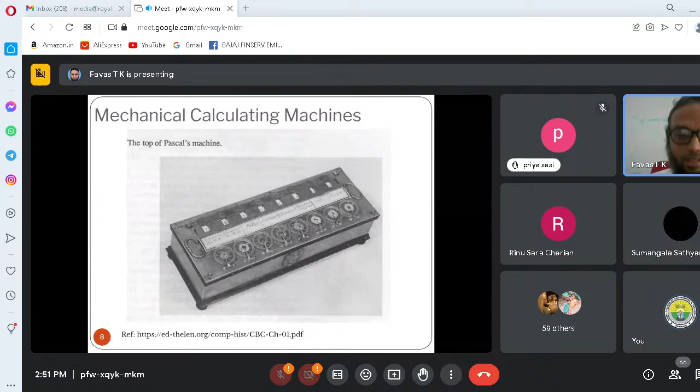Several mechanical calculation machines like Pascal's machine and Leibniz machine operated mechanically. Especially we have the mechanical engineering stream as part of this conference. A lot of gears and gear-based mechanical arrangements were used for calculations.

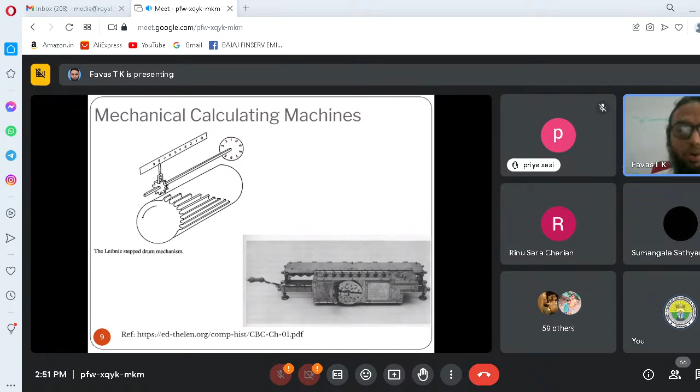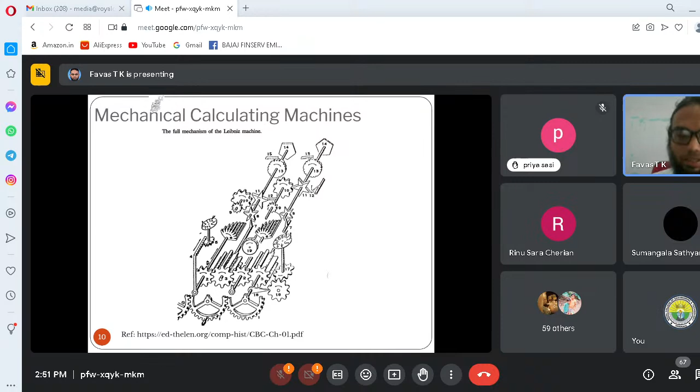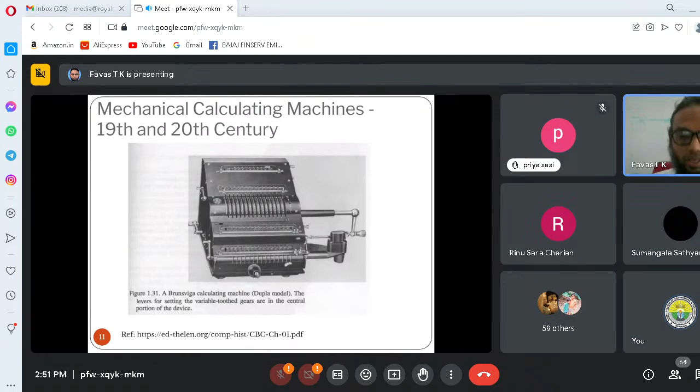This is also the mechanism of the Leibniz machine. You can see a lot of gears, wheels, pinions, and shafts in such mechanical calculating machines. Some more advanced mechanical calculating machines came later in the 19th and 20th centuries. This is one of such calculating machines, and the Millionaire, another calculating machine.

Then the history of modern computers: we know scientists like Charles Babbage, and in the 19th century the development of modern computers actually happened.

Then the different generations of computers: the first generation using vacuum tubes, second generation using transistors, third generation using ICs, and the fourth and fifth generations using very large scale integration (VLSI), ULSI, and microprocessors, etc.

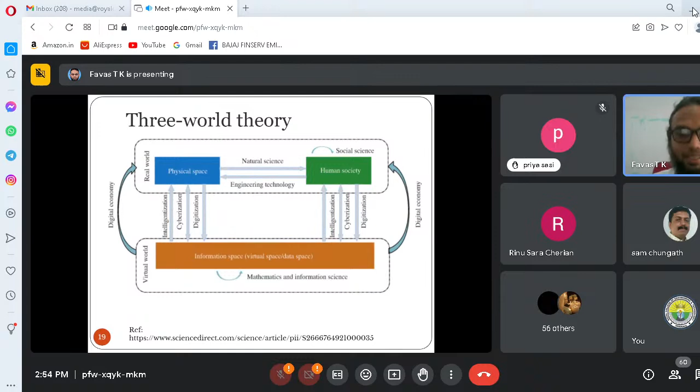Now in the present, we have the physical space, human society, and another space which is the information space, or virtual space, or data space. This is the three-world theory of the present.

Along with the development of computing power, another issue we are facing is the generation of heat from these sources. All computers have become miniaturized, and we have handy or pocket-sized computers, but the number of chips is increasing while the density or space is very limited.

That means heat generation is increasing while the size is decreasing. This is creating a lot of issues, and one prediction says it may even approach the heat generation of a nuclear reactor from these small-sized devices. A lot of accidents are being reported nowadays - bursting batteries and similar cases are being reported in the media.

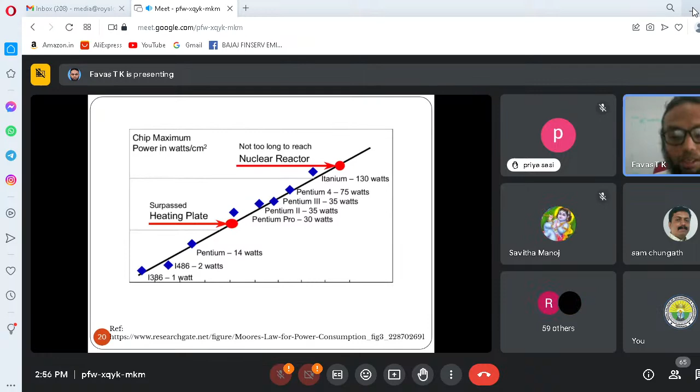The cooling of these computers is also another important area, along with the increase in computational power and computational speed. We should have technologies for the cooling of computers and computing devices.

Coming to engineering prediction, in any branch of engineering we have different methods of prediction: experimental, analytical, and numerical. We do experiments in laboratories and find out, with respect to some independent variable, how the dependent variable varies and how the performance is. Different performance curves are plotted irrespective of the engineering branch.

Then we have another method, the analytical method, where we basically solve the mathematical equations pertinent to that particular problem. Numerical methods are also there, meaning we solve the problems numerically.

The growth of computers has contributed a lot to the development and acceptance of numerical methods. The numerical methods are basically a subset of mathematics.

We have numerical analysis in mathematics. Generally, in the BTech curriculum, the third or fourth semester, numerical analysis is taught. Numerical methods in engineering is also there.

But the growth of computers and computational speed has also caused a lot of acceptance for numerical problem solving or numerical methods in engineering. This means we can get solutions fast from numerical methods.

The experimental methods generally may take time and also be costly. A lot of apparatus setup is required for the experiments.

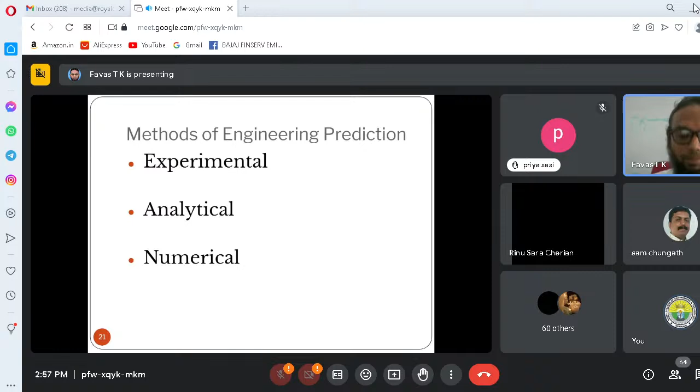In any of our engineering subjects, basically what we are doing is developing a simple mathematical model. Whether it is a fluid mechanics subject or a solid mechanics subject, what we are doing is explaining a physical process and trying to develop that process in terms of some independent variable and dependent variable—how the dependent variable varies with independent variables, some parameters, and some forcing functions.

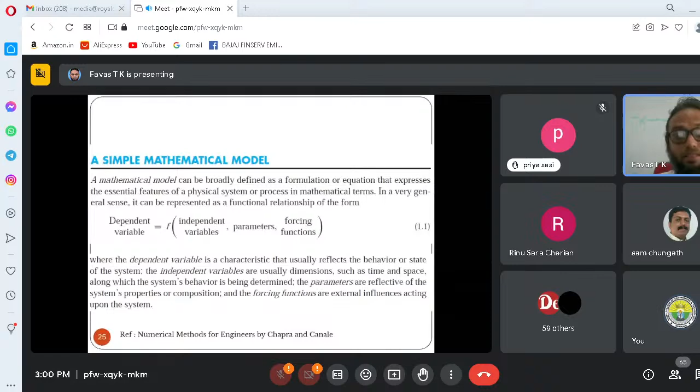How this relation development or derivation is the basis of any engineering subject, or at the end of the subject or module for a particular engineering subject you are studying—what is happening is that there may be the derivation of a particular equation subjected to that physical phenomena.

Such differential equations are very common, and sometimes there may be algebraic equations. Algebraic equations are very easy to handle, but whenever it comes to differential equations or complex differential equations, you can see that in mathematics, physics, chemistry, biochemistry, economics—everywhere differential equations are there. Whenever coming to engineering problem solving related with fluid mechanics, solid mechanics, and chemical species or mass concentrations,

related to mass species, we are using some general principles of nature, like the law of conservation of mass, law of conservation of momentum, law of conservation of energy. Then we are formulating integral or differential forms. Sometimes the differential equations may be ordinary differential equations or partial differential equations—we have to solve them. These partial differential equations may be linear or non-linear.

There is also some mathematical nature of the equations. Elliptic equations may be there, like Laplace equation, Poisson equation in mathematics. Then parabolic equations may be there. Hyperbolic equations like wave equations may be there. So these types of governing equations we are basically deducing in our engineering subjects.

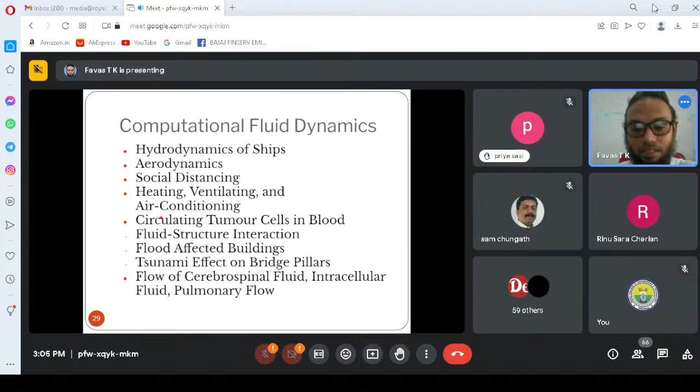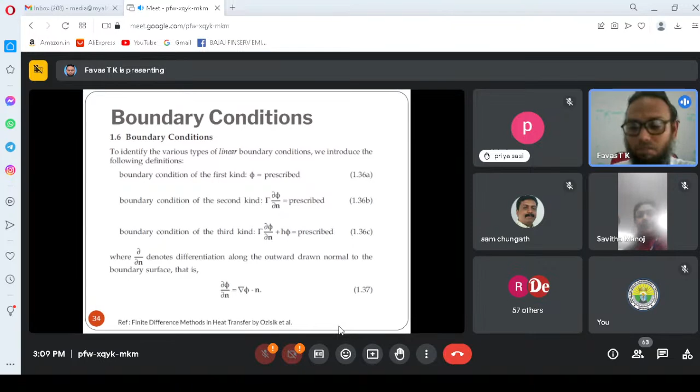Realistic boundary conditions are required so that we get a unique solution to the problem. There are different types of conditions. If a dependent variable value is specified, or its derivative is specified - this is a Dirichlet boundary condition. Another one is if the derivative value is specified - Neumann boundary condition. Different types of boundary conditions are there, so mathematical knowledge is also important in CFD-based problem solving.

Then we find out some independent and dependent variables - primary quantities like velocity, pressure, temperature, etc. will be predicted. Using these primary quantities, some secondary quantities like wall shear stress, drag force, or heat flux can be determined.

We have an ODE, dy by dt is equal to a function of y. We rewrite this in another form - not much mathematics, just two examples. This dy by dt, a function, is rewritten as yi plus 1 equals yi plus f into delta t. So this is an ODE, an ordinary differential equation, and the other one is a linear equation.

This transformation technique is generally called a discretization technique in computational fluid dynamics. We are transforming an ODE into an approximate linear or algebraic equation. That is what is happening in computational fluid dynamics, and these algebraic equations are then solved using high-speed computers.

Another difference is that partial differential equations represent continuously varying functions. But this continuously varying function in a 2D domain - you are finding the solution only at discrete points. That is why this is an approximate method. You are not finding the solution over a continuous domain, only at discrete points using computational fluid dynamics, and that is also a limitation with the computers.

You have to be cautious about errors, since it is an approximate method. Instead of dy by dt, where at each point the slope is varying for a curve, you are finding the slope based on some discrete points. So it is an approximate method, and some error will obviously be there.

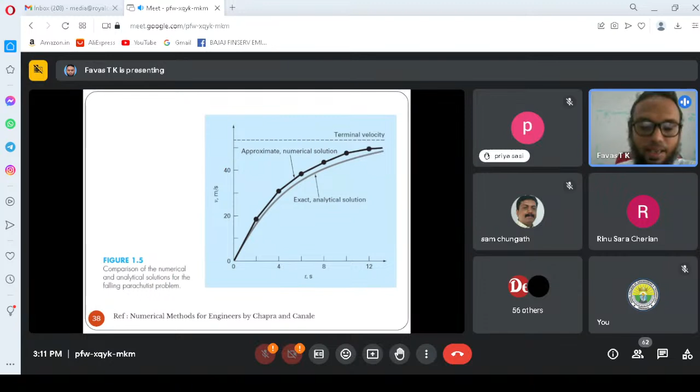You can see a comparison given in Numerical Methods for Engineers by Chapra and Canale. The exact analytical solution of the partial differential equation looks like this, while the other one - found only at discrete points - is the approximate numerical solution, where some error is present. We can reduce these errors by some techniques, by being cautious and properly choosing the grid size and other parameters. But it remains an approximate method - that should be kept in mind.

This computational fluid dynamics problem solving is generally now done using some programming languages like Fortran, C, C++, Python, or some open source software packages like OpenFOAM, one of the extensively used ones, and ModFlow, etc. And some commercial software packages, ANSYS, Fluent, StarCCM+, MATLAB. All this can be used for computational fluid dynamics based problem solving.

And there are obviously, in that, some errors. Like truncation error means error in the formulation. The other one is the round off error, because the computer will be chopping off some digits after some significant digits, some error. So you should have a vision on the errors also.

What is this conversion to algebraic equation in CFD basically done? What we are doing is that we are discretizing the equation. The partial differential equations you are transforming into an algebraic equation, and then we are solving by the computer. There are different methods like finite difference method, finite element method, finite volume method, etc. for this discretization. That means partial differential equations you are converting into algebraic equations not at a single point, at thousands of points. That means thousands of algebraic equations you are obtaining, and manual solution of these thousands of algebraic equations may be quite difficult. Then we are going for high speed computing.

And you can apply this in almost all branches of engineering. If you are taking the marine transportation system, underwater vehicles, surface vehicles, submarines, autonomous vehicles, everywhere there are a lot of applications for this CFD-based problem solving.

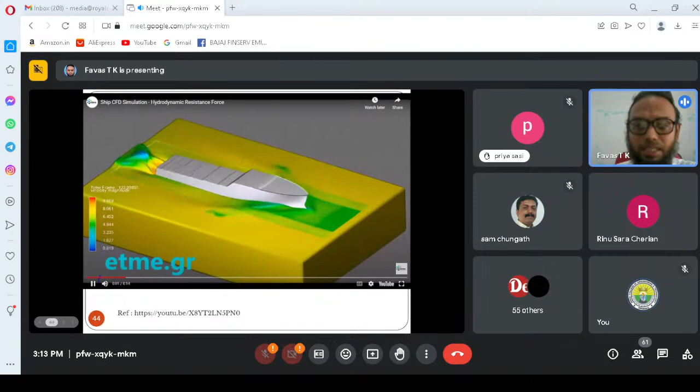And the drag force can be determined, and the engine efficiency can be determined. We can do some ship CFD simulation, hydrodynamic resistance force, and here the velocity can be, sometimes it is also called colorful fluid dynamics, meaning a lot of information can be simulated in colors, but the insight is also very important in this.

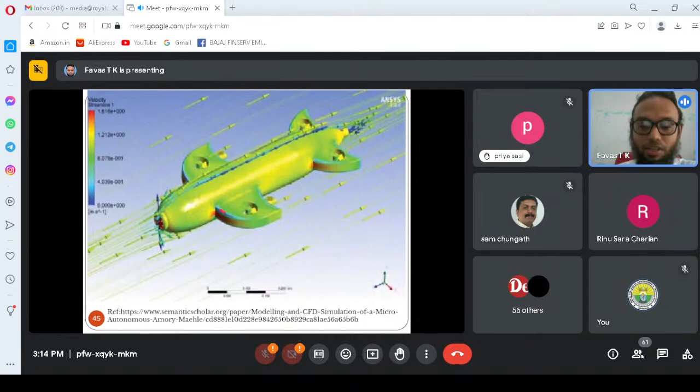You can see the velocity along an autonomous underwater vehicle, AUV, and the different colors, you can see that red is the highest velocity and blue is the lowest velocity, where the highest velocity is there, and where the lowest velocity is there. That means the friction, or some areas are not smooth. Wherever the smoothness is there, there will be higher velocity.

And the pressure is predicted using some ANSYS-based computational fluid dynamics package. These are done by some scholars and available in literature, and here also how the pressure values are varying at different locations.

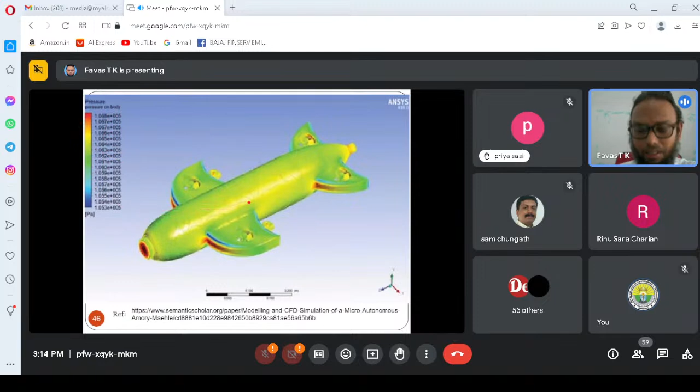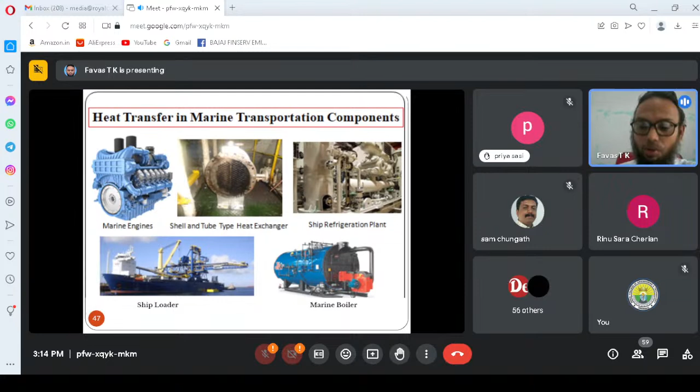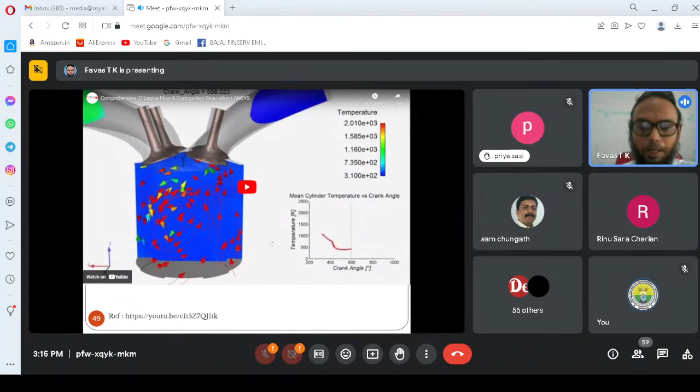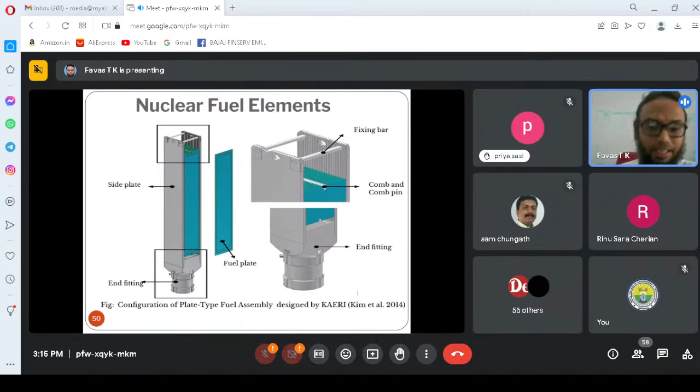And for the solution of nuclear fuel elements, because experiment is very dangerous, its cooling can be predicted on nuclear submarines, and inside how the nuclear reaction and its cooling happens, and there should not be any nuclear accidents, and that can be prevented, or such studies can be done using that. Meaning nuclear meltdown has to be prevented in nuclear submarines and nuclear power plants, and that can be predicted using computers with the help of computational fluid dynamics tools.

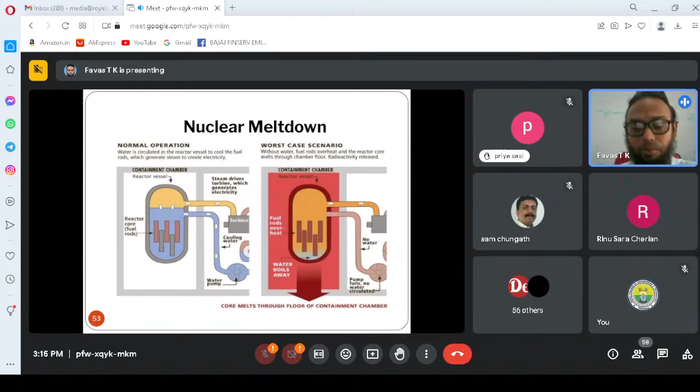And even the cooling of fans in computing, even inside the computers, we can have some applications of computational fluid dynamics. The design of the fans, SMPS fan, case fan, all these can determine how much air circulation is there and how the cooling is there. There also we are solving the continuity, momentum, and energy equation. These partial differential equations we are transforming into algebraic equations, and we are solving using computational fluid dynamics. And even in our laptops, the heat pipes are there for carrying away the heat using computational fluid dynamics.

Even in centrifugal pumps, the vorticity magnitude can be predicted using computational fluid dynamics.

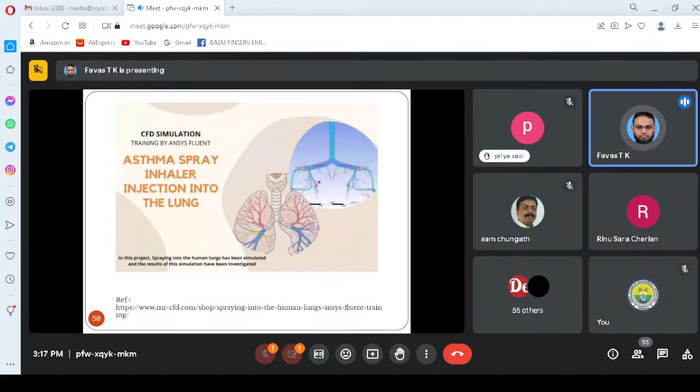Even in health applications, like asthma spray inhaler injection into the lung, if a spray is inhaled, the concentration of that medicinal part reaching the lungs at each point can be predicted using computational fluid dynamics.

Even in vehicles, there is vehicle aerodynamic simulation, and safety simulation can be done for the aerodynamic study of vehicles. This was done using STAR-CCM, showing indicators and total pressure, how the pressure and streamlines can be predicted. A lot of such applications can be done, and all this can be predicted.

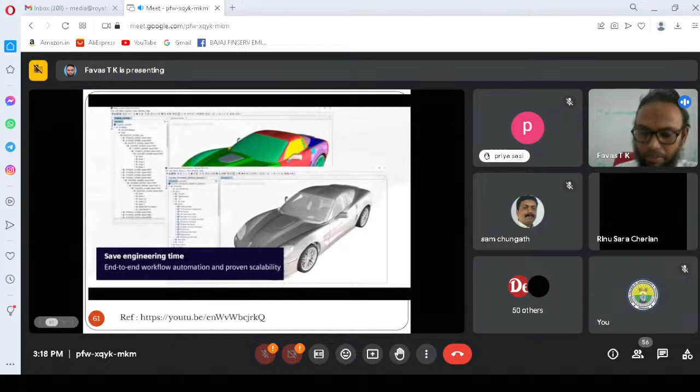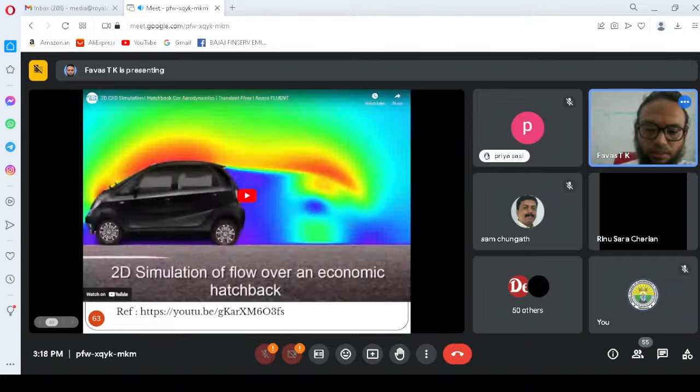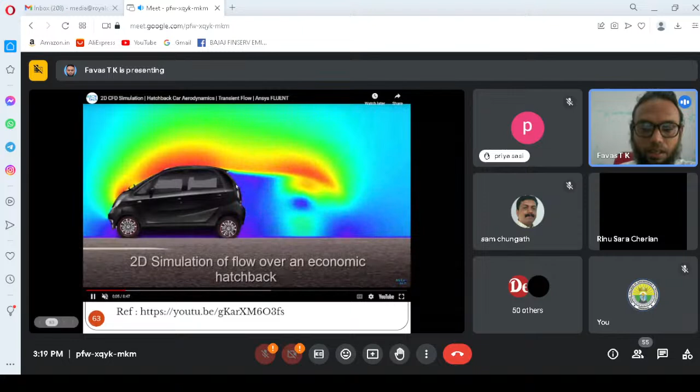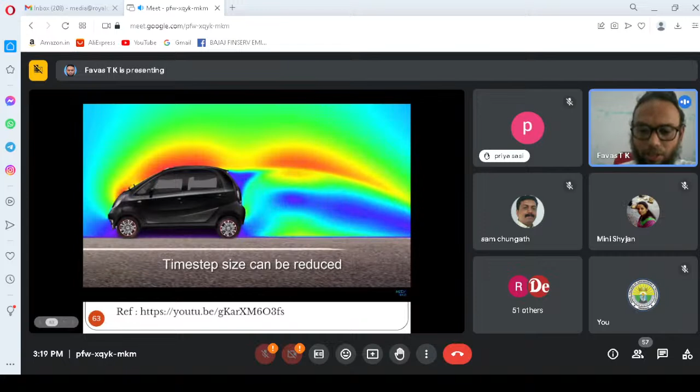For racing car simulation, we can use this too. In a 2D simulation of car aerodynamics, showing how the flow behaves around a car, these colors represent a transient or unsteady state analysis for a particular time step, with velocity plots simulated.

For aeroplanes, full aircraft safety analysis is done for lift and drag coefficients, all found using computational fluid dynamics. Aircraft performance is also done using similar methods, and it is well understood to be optimal.

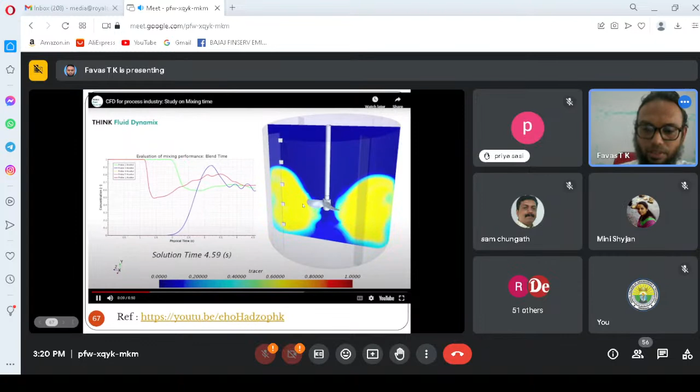In process industries, mixing performance in chemical or processing industries, solution time, blend time, all this can be predicted using computational fluid dynamics studies. There are also interesting studies, like how a drinking straw works, with one opening at the bottom and another additional opening, studying how much particle entering from the bottom opening reaches the other end and its concentration, all studied using CFD-based simulations.

In the pharmaceutical industry and biotechnology industries, these applications are also used. In plant breeding and agriculture, crop modeling and some online assessment tools use computational-based prediction in agriculture.

Now, for the last 10 minutes, we'll talk about the future. Whatever present studies we have show how computational fluid dynamics based predictions exist in all branches of engineering, all fields of human life, science, health, medicine, and agriculture. Everywhere such predictions now exist, and more fields are shifting towards computational methods.

There are experimental setups like ship tests. We have boat or ship testing, stability testing discussed in the media, and many towing tank arrangements requiring crores of rupees in investment. Now whatever such experiments can be done, the same accuracy can be achieved using computational fluid dynamics. That much capability exists in computational fluid dynamics or computational methods.